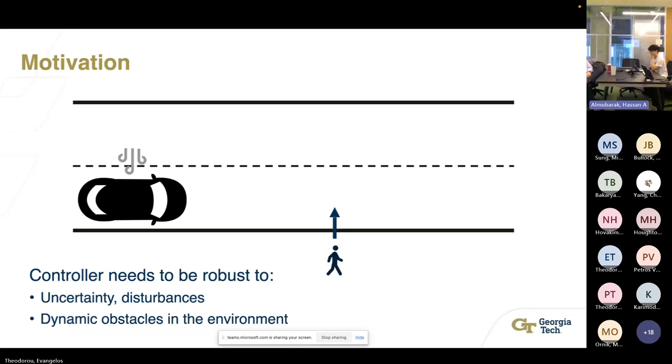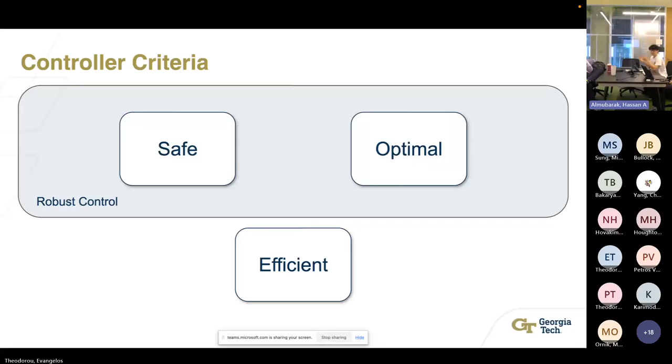For an autonomous car, this could take the form of pedestrians or other vehicles that we're interacting with. And so our main controller desiderata is that it needs to be safe, it has to be optimal, and importantly for these autonomous systems, the control has to be efficient. The field of robust control has studied these problems. It gives you ways to design controllers that are both safe and optimal, but not all of these algorithms are very efficient. But there is one class that has proven to be efficient, known as tube-based model predictive control algorithms.

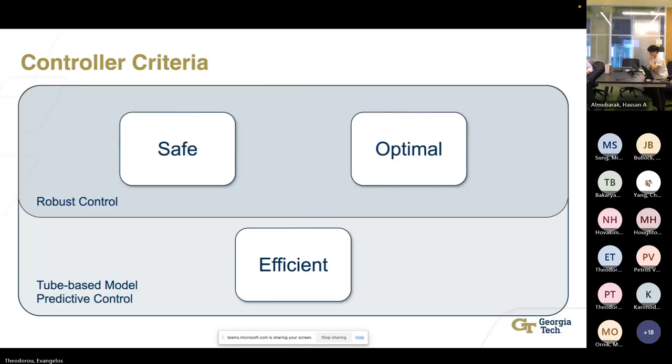They are computationally efficient by taking advantage of model predictive control, and they're able to maintain safety and optimality while doing so. So a brief overview of these tube-based MPC approaches: let's consider we're trying to control this autonomous car here. I don't think I have a pointer, but we want it to remain in the black bounds. That could correspond to lanes or a racetrack. And so tube-based MPC approaches divide the problem into two layers.

The first layer is a nominal controller, and it generates a nominal trajectory that you want to follow. And the second layer is a feedback controller that augments your nominal system, and it guarantees that the true state remains safe in the presence of uncertainty. Something I want to highlight is that actually computing the tube is intractable, especially for nonlinear systems, so really it exists for theoretical bounds. What these tube-based approaches can say is that given some knowledge of the uncertainty, we can guarantee the true state remains in this safe tube.

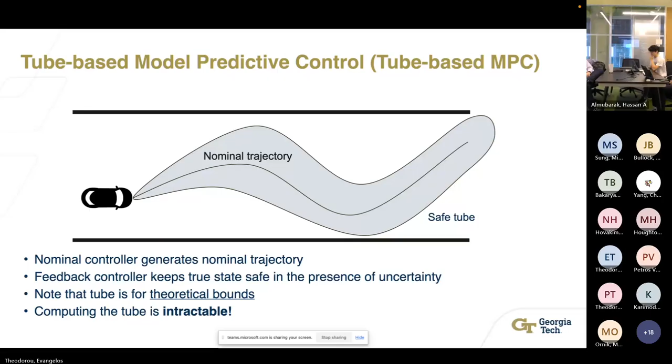And so these approaches have some downsides actually. So as I said, there's no free lunch. So you actually have to know the uncertainty a priori. These methodologies have difficulty actually responding to the environment, especially if there's very large disturbances. And then they're also notoriously difficult to tune. And that is kind of a function of, because you've essentially added another controller to your control problem. So now the parameters of your controller have a very nonlinear effect on the resultant solution.

And so to address these three disadvantages of these tube-based approaches, we propose to add on a differentiable optimization layer. And so we're titling our algorithm differentiable tube-based MPC. And in summary, this differentiable tube-based MPC enables one to tune your controller parameters online and in real time, but in a principled manner. So principled here meaning optimal.

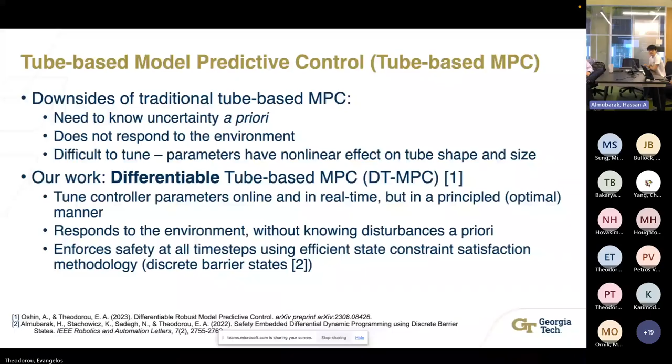It allows the controller itself to respond to the environment. And a key aspect is we don't have to make any assumptions on the disturbances a priori. So we're actually able to respond to the disturbances that we're experiencing. And then to enforce safety, as Evangelos mentioned earlier, we're using discrete barrier states, which Hassan will talk about a little bit later in more detail.

And then I'm going to quickly go through some of the theory. So essentially, differentiable optimization is basically how you take gradients through an argmin operator. So when you have an optimization problem, you have some solver. It gives you a solution, and that solution is essentially approximating an argmin operator. And I take gradients through that.

The optimal control problem. And so here we have an optimal control problem. It's a function of the parameters, and we're going to ask the question, okay, how can we choose these parameters optimally? To do so, we'll define this upper level loss function that kind of encodes what optimality means. This function actually acts on that solution to the lower level control problem.

So now we have this kind of high level optimization. At the high level, we're minimizing this loss function with respect to the parameters. And those parameters actually determine the solution to the lower level control problem. And then the next question you could ask is, okay, how do we actually compute these gradients with respect to the parameters efficiently? And to do so, we'll use differentiable optimization.

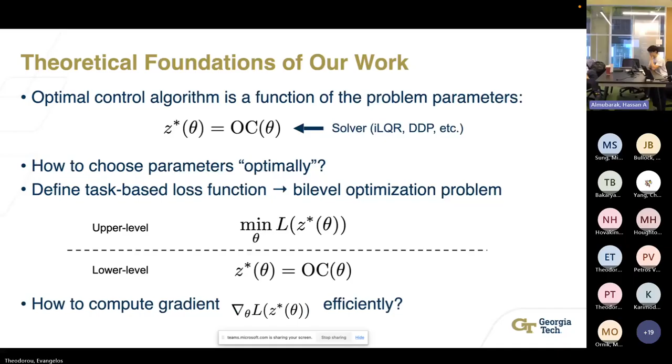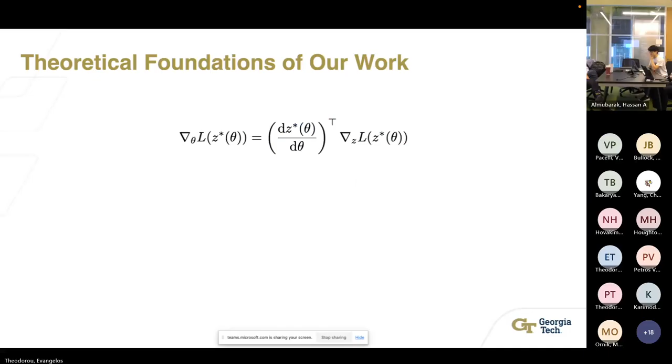And so if we look at the chain rule for this gradient term we're trying to compute, it ends up decomposing into a Jacobian term. So dz star... The term on the right is pretty easy to compute. Usually it has an analytic or closed form expression, but the Jacobian term is not, and so to actually compute that derivative, we'll use the implicit function theorem. It's a lot of words, but basically for computing that.

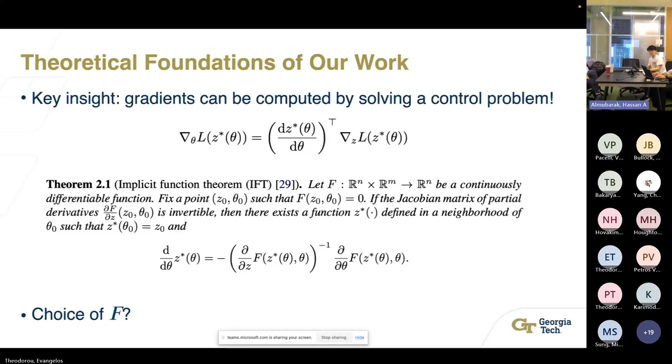And kind of the key aspect is, it's going to turn out that the choice of f for the optimal control problem is going to be the gradient of your Lagrangian. And so the Lagrangian comes from constrained optimization. It's basically the cost you're trying to minimize augmented with your constraints times some Lagrange multipliers. In this case, the constraints we're looking at are the dynamics.

And when you actually find a solution to your control problem, you're actually finding a point where the gradient of this Lagrangian is equal to 0. And so that's why of the Lagrangian... Knowing this now, we have a method for computing this Jacobian term. And this is kind of what we go through in our paper. With this theoretical derivation, we're actually able to generalize a bunch of prior works in the field.

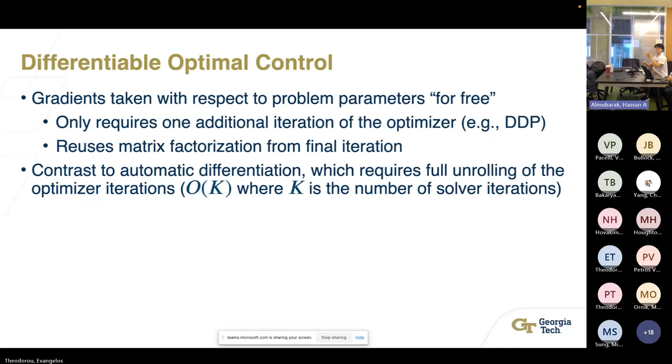And so we can contrast this with, say, automatic differentiation. In that, we would have to actually unroll all of the operations of our DDP solver, and so that would incur a cost of roughly O of K, where K is the number of solver iterations you needed to converge to a solution. But in this case, using the differentiable optimization, you actually get an algorithm that's O of 1, so constant time with respect to the number of solver iterations.

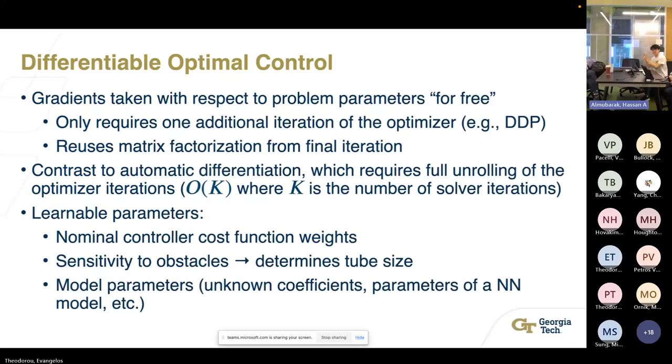And then some examples of these learnable parameters. So that theta vector, these could be your cost function weights in your nominal controller. We're going to see an example where it kind of has this interpretation of your sensitivity to obstacles, and that's going to determine the tube size in this tube-based MPC approach. And they could also correspond to, say, unknown coefficients in your physics-based dynamics model or the parameters of a neural network, things like that.

And then the safe set we're trying to remain in, so Z, which is a function of theta bar, that's going to be where that sensitivity to obstacles is incorporated. So that's why Z is parameterized by theta bar. And then we're going to augment that system with this ancillary control problem. And this is basically the feedback controller. So it's kind of trying to keep us close to the X bar and the U bar that we get from the nominal control problem. And then that control problem itself is a function of its own parameters, which we call theta. And then we're going to use differentiable optimization to optimize for both theta bar and theta.

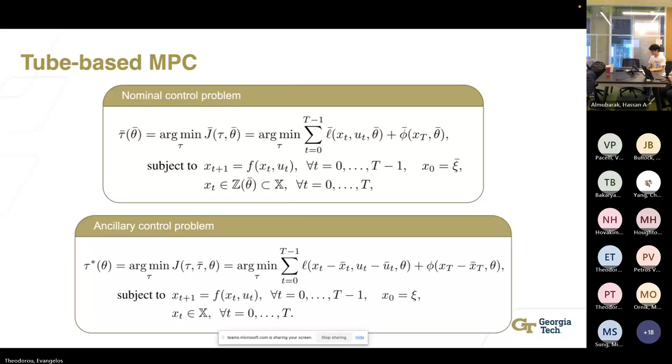And kind of like a key piece here is this Amos et al. Differentiable MPC, and it's very well-known work in this field. But one of the issues with their work, while very fast, it actually results in incorrect gradients for the problem that you're trying to solve. So yeah, our work is essentially like an improvement over theirs in that regard.

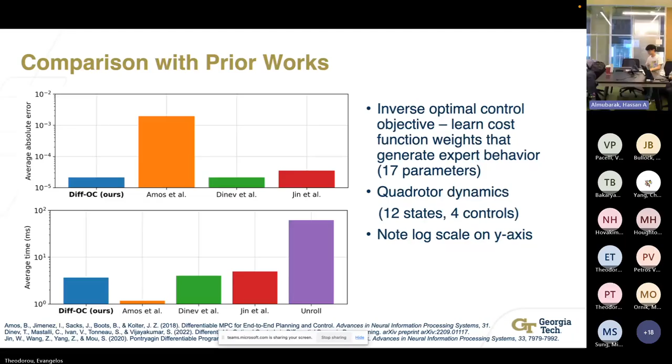And then some quick experimental results compared to a standard nonlinear tube-based MPC approach. And so success here is defined as reaching a target state that we want to reach, and then something that I wanted to highlight was that the disturbances are very large actually for these systems. So it's roughly on the order of half the maximum control that we're able to apply to the system. And then for the robot arm, it's actually roughly 5 times the control magnitude. And it actually is able to perform very well. And I'll talk about them in detail now.

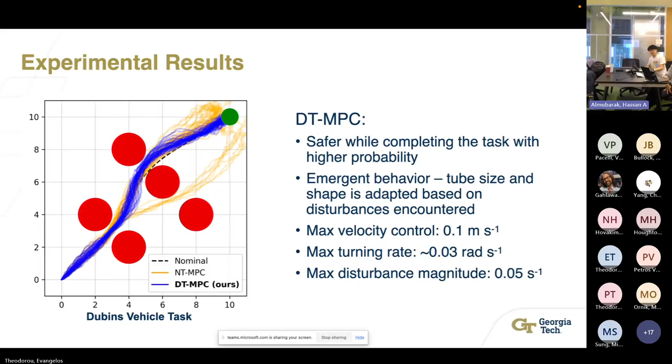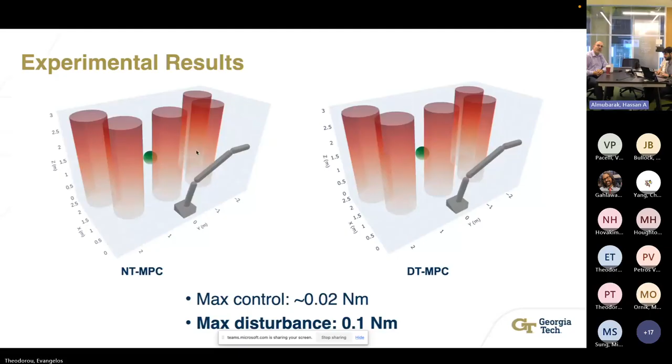Thank you very much, Alex. We go now to the second part of the presentation where Hassan is going to be talking about barrier states and how they were used in the previous presentation, and the way they were tuned was through this approach of differentiable optimization. So yeah, let's go now with Hassan. Hassan, the audience is yours. Yeah, thank you, Evangelos.

I'll talk about the idea of barrier states here, and then some implementations of barrier states within optimization. I'll be introducing multiple concepts. So basically, this is a general setup of the safety critical problem, where basically some nonlinear system is subject to those safety constraints.

Safe set, controlled invariant. So basically, once we start in this safe set, we stay in this set. And so the goal here is to design a feedback policy that achieves any other performance objectives while ensuring safety, or ensuring controlled invariance of this safe set.

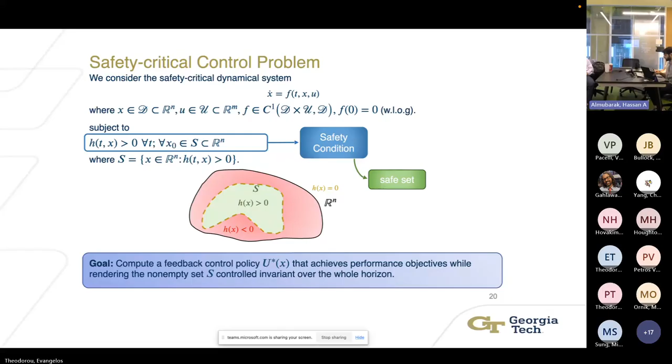And so the idea of barrier states stems from barrier functions in optimization. So as you may know, classical barrier functions basically are functions that are smooth in the feasible set and that basically blow up as we approach the infeasible regions, or unsafe regions in our case.

And so the idea here is to derive the barrier function's evolution over time, and then augment those dynamics to our system, and basically now deal with this system that we call the safety embedded system. So now, instead of dealing with the original system with its constraints, we deal with this augmented system that has the states of the system as well as the states of the barrier.

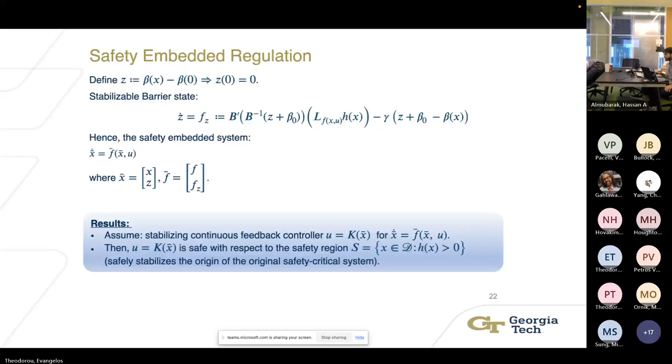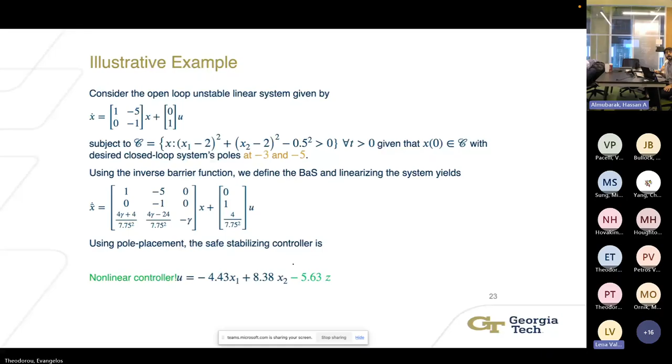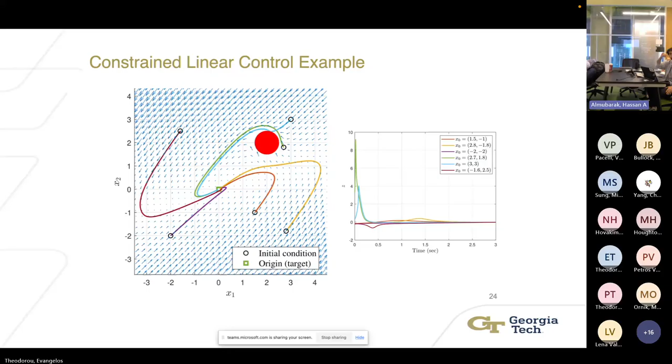And as we can see, the behavior of the closed loop system is really nonlinear, where the vector fields approach the obstacle but then start to turn away from the obstacles, as can be seen also from some trajectories here. So this idea of barrier states is also really helpful in the context of optimal control, because as we just saw, we were able to simply use pole placement. Now, the same legacy control methods can be used directly.

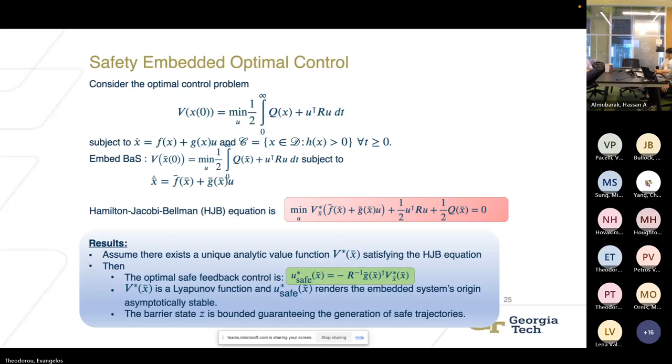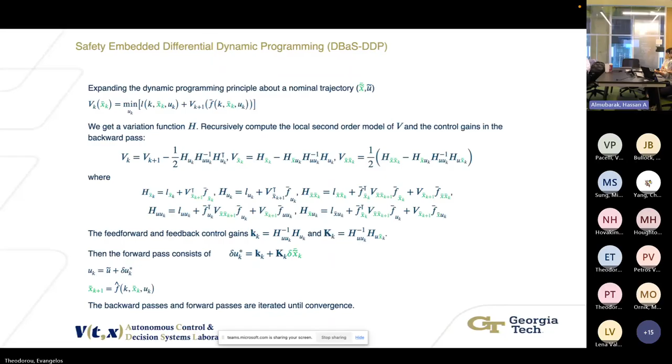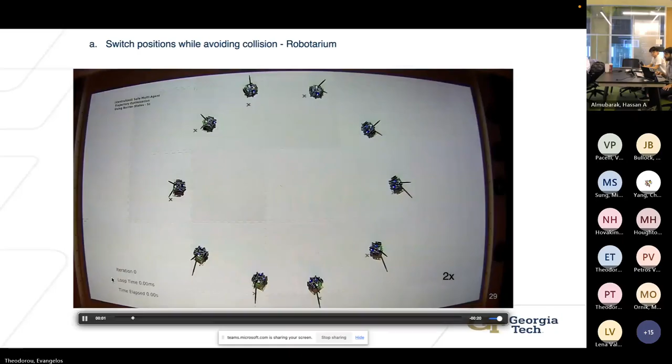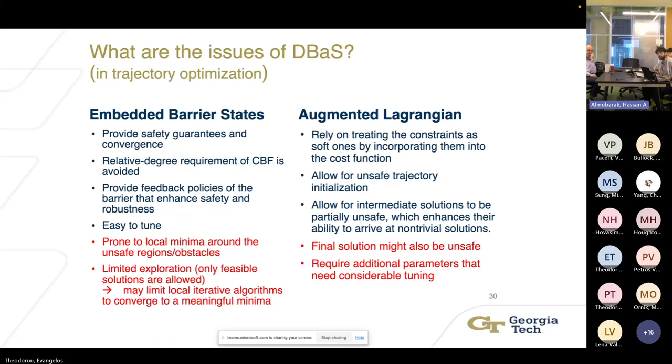Our optimal control problem and trying to find the Lagrange multipliers. And so the idea can basically, then can we really kind of merge the bit? And so we propose the idea of tolerant barrier states, where we basically try, as I say, to kind of merge those capabilities of barrier states as well as augmented Lagrangian.

Can we stop the camera so that we can make a better use of the bandwidth? Yeah, sure. Can you guys hear us well right now? Right now, yes, but the voice has been breaking all the time for me. Okay.

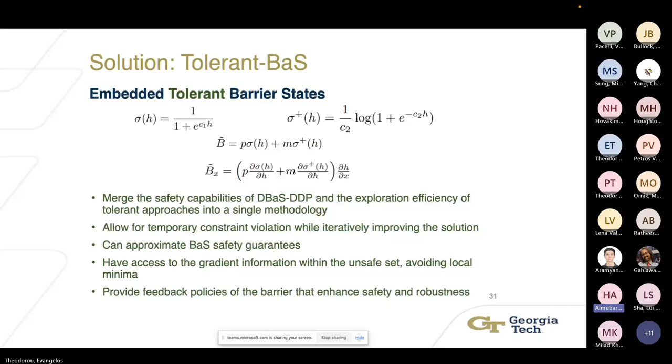Not only around the obstacle or the unsafe region do we have those gradients pointing outwards, but also inside. And we can control how aggressive those gradients are.

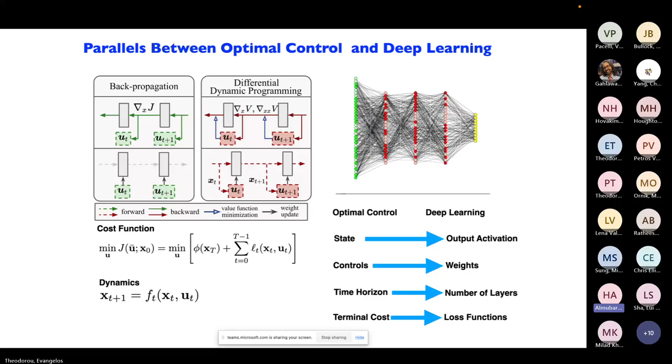It has been done to show that backpropagation is nothing else than a version of the iterative Pontryagin maximum principle. So backpropagation essentially is the backpropagation of the costate that we have in the Pontryagin maximum principle. And what we have done here is go one step further and say, in optimal control theory, we know how to ask the question of robust optimal control, and the way to do that is with minimax optimization problems.

Now, this is robustness in the time domain, where we have a finite time horizon optimal control problem, with an optimal control U and the adversary V. And now we try to solve this problem, with both the control and the adversary being part of the dynamics.

So then we use this formulation to derive backpropagation equations that backpropagate the value function within the neural network, so that we train the neural network in a robust fashion, meaning that we optimize the neural network such that it takes into account the adversary controller, which in that case could be noise in the data, or certain variations that you may have in the input of the neural network.

And so, basically, one of the issues, I guess the price that you have to pay, is that now you don't have only weights, you also have the adversarial weights that you have to use in order to be able to do the optimization, right?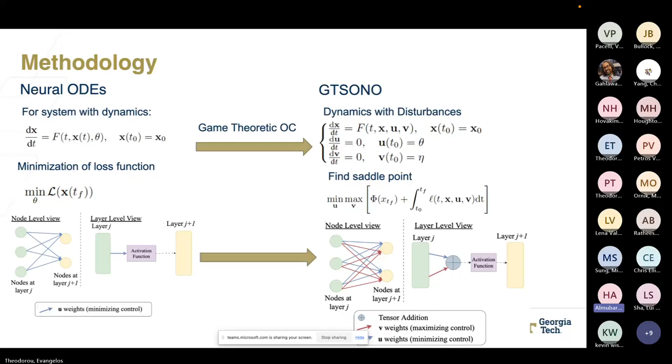Because remember, we have mapped the weights down to controls, and therefore now we have the good controller and the adversary controller, right? And what these plots show is that for every connection from one layer to another layer, you will have essentially two weights, one for the optimal control and one for the adversary control. And so this is how the algorithm works.

Essentially, you will derive the backward pass, which is a generalization of the Riccati equation. You will have a new formulation of the backprop algorithm, which takes into account second-order information, and you just follow the iterative process of training the neural network in this way. So this is a paper that we have just submitted.

I just want to mention on millions of parameters. So scaling optimal control is important. In the paper, you can see how we can use the architecture of the neural network to impose Kronecker factorization on our value function so that we are able to scale the computation to millions of parameters. From an optimal control perspective, that's very large. These slides give you another part of the

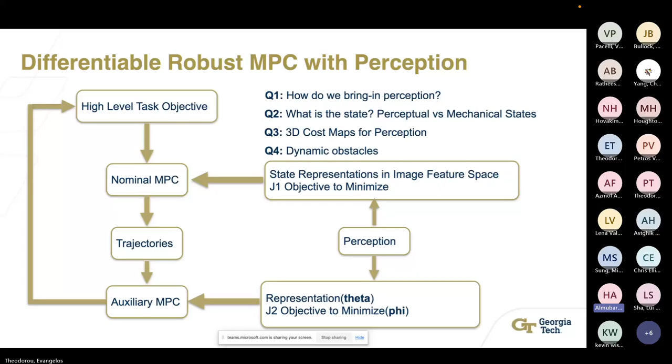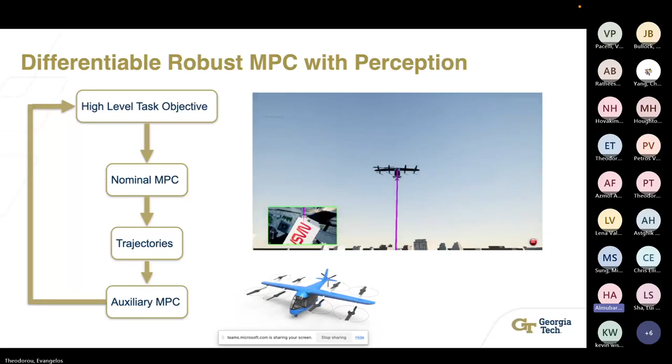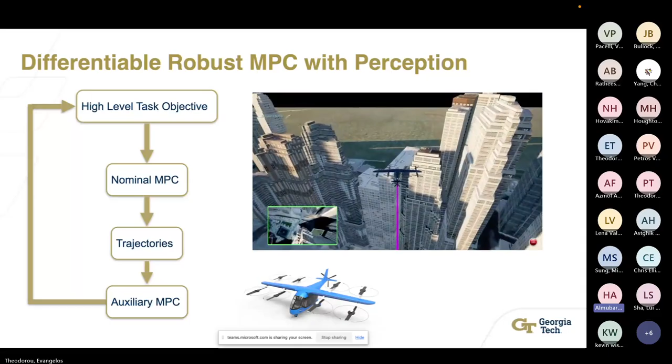And of course, we have done some work here on UAM vehicles, and we have had a very nice paper on parametric differentiable dynamic programming. So we really want to go one step further and see how we can work more with dynamics of these vehicles and with more complex simulation environments, and use these dynamics inside the differentiable robust MPC framework.

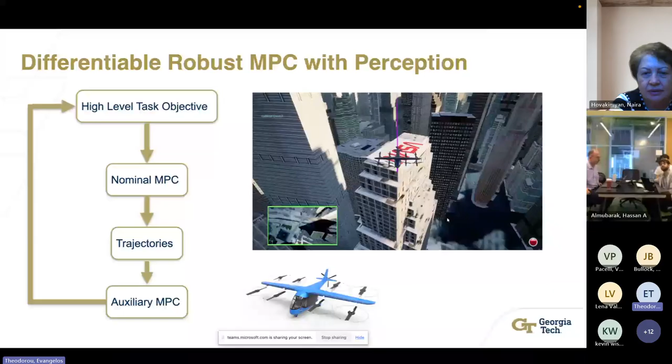Evangelos, you break up. Just talk at the microphone. Now you're muted even. Okay, can you hear me now? Good. You are again muted. I'm not muted. Or is your speaker off? No. Are you answering the question? If you're answering, you're muted. We can't hear you. Can you hear me now?

Yes. Okay. So, if I understand correctly, the question is, there are constraints that are very hard to write down mathematically, but you can generate trajectories, play them on the hardware in multiple iterations, and collect data. And how can all of that be embedded within MPC? Is this the right way to put it? Yes, that's good.